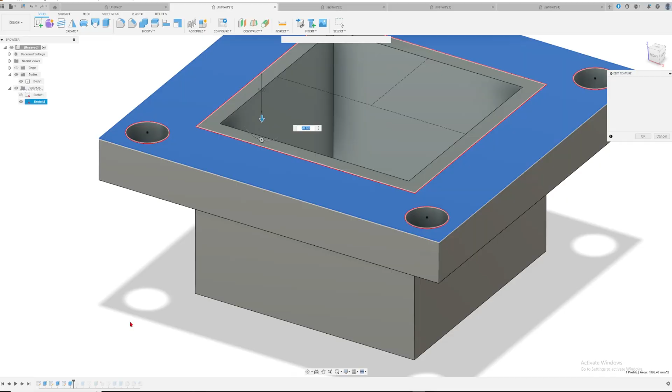So back when I started 3D printing, I used Fusion 360 to model all my stuff. And the things that I modeled there had overhangs, and I did not know how to overcome those overhangs. So once I made the model, I just put it into whatever slicer I used, sliced it, then generated supports to hold up that part of the model.

But as time went on, supports started to get annoying, and if you print with supports, you will know exactly what I mean. Supports give you a bad shape. The shape turns out not as good as you think. It has a different shape or form, whatever it is. And sometimes the support will stick super well to your model, and if you take off the support, you might take a piece of your model off. It's just very bad, hard to remove, and wastes material.

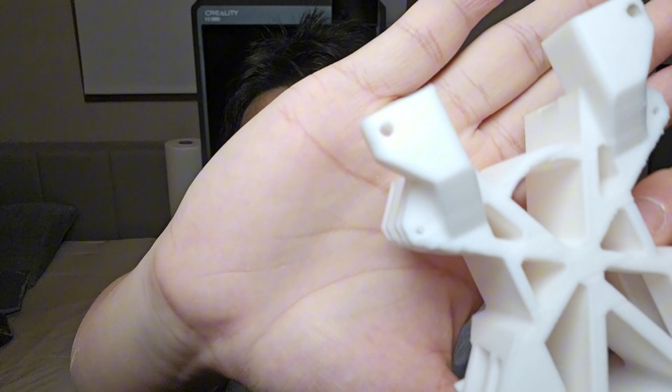As you can see there, it's kind of bad, but this piece is PC material, and PC is not the best material for overhangs, but it's still printing well like that. It's functional and useful, so it's really good. If this was PLA or PETG, this overhang would be flawless.

But besides that, this thing is complex and it's also still very strong. If I didn't do the cutout right here, it would just be fully infilled and it would look not good, not cool like this, right? It has this overextension, screws here, a rod there. It also has a connection right here, and then another connection right here.

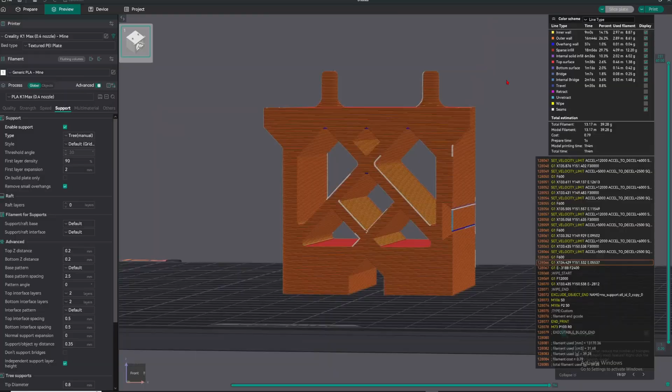And as you can see, this is not exactly identical. This part has this cut-in, this part does not. It's very complex, but like I said, printed with no support at all. And I'll show you now how I model these kinds of models. Very complex, multiple purposes, and still printed perfectly with no support at all. So let's head over to Fusion 360 and I'll show you how I model these kinds of parts.

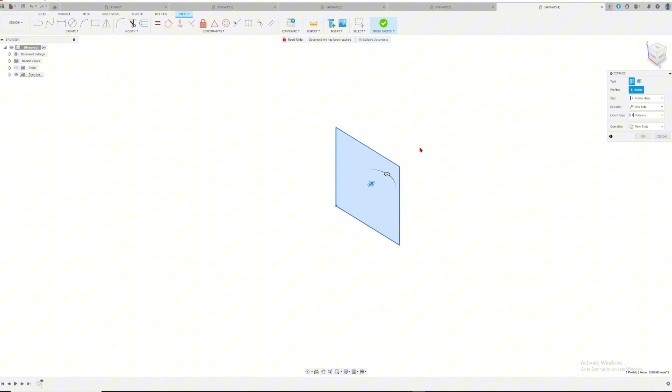We are now in Fusion 360, so I'm going to show you how I design those 45-degree angles so that I don't have to use supports while 3D printing and save a lot of material. So I'm just going to start with the cube again, 50 by 50 by 50 millimeters. Let's say for this cube, you need to attach it on the bottom and on the side, and on the top it has some other things pointing out. On the side you have screws. It's just a complicated box, so let's get started.

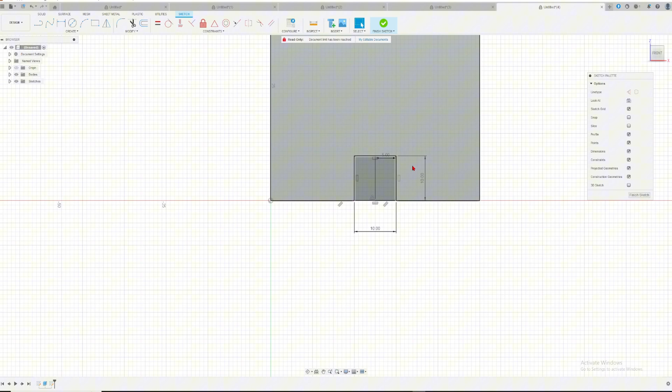So for the bottom here, I'm just gonna make a 10 by 10 cutout right here. R for rectangle, and then we're gonna do 10 by 10. E, extrude all the way through like that. Okay, so now we cannot print like this anymore. We can still print it the opposite way, right? So yeah, that's good. But what if we have some overhang up here too?

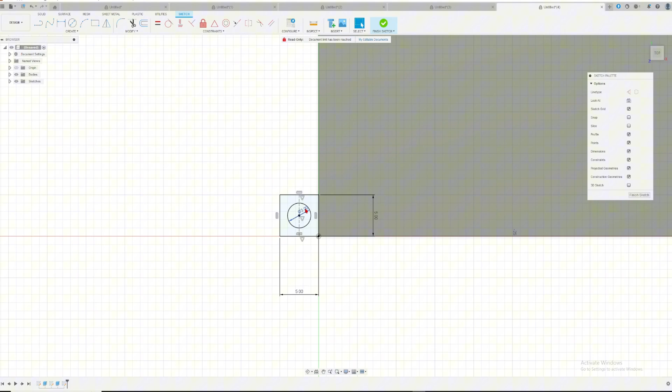So now I'm gonna make a sketch on the top face. R for rectangle, and I'll do a 5 by 5 square right there. I'll find the midpoint right here. C for circle, and then I'll do 3 millimeters. Let's say it's a 3 millimeter screw, right?

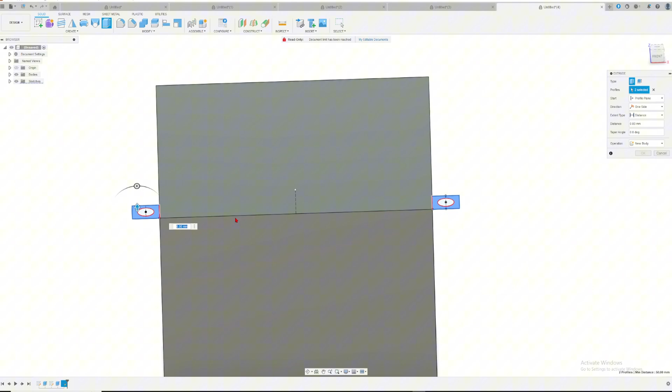And to do it for the other side, I will have to find the midpoint right here. Select everything here. Click mirror. Mirror line, the middle, click enter, and now we mirror this to the other side. Press E for extrude. We're gonna extrude this by just -5 millimeters, or 5 millimeters below. So now we cannot print like this anymore because we have overhang here.

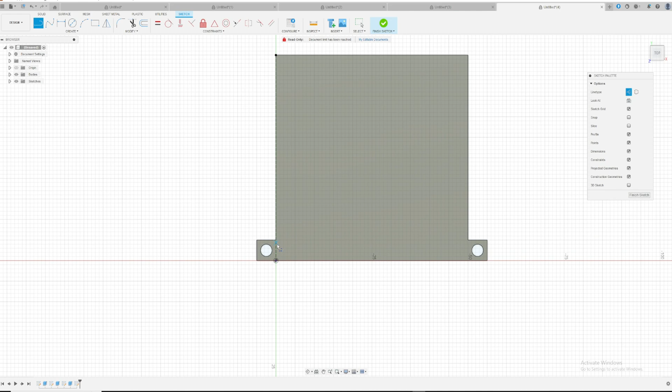And let's say at the top here, I'm gonna have to find the middle point, so I'm gonna make a new construction line. X for construction, or you can go over to the sketch palette and click construction line. And then I'm gonna make a line all the way through, because with this right here we cannot find the midpoint anymore. Well, we can, but it's a little bit off. So now I'm gonna draw a 10 millimeter line right here. Same thing with the other side.

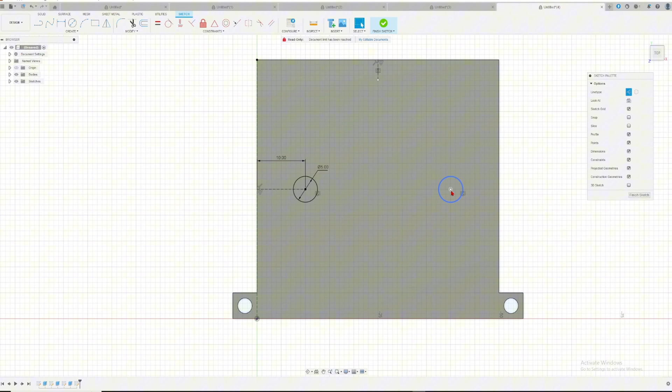And right here I'm gonna be making a 5 millimeter circle just for fun. And then to mirror it to the other side, I want to find the midpoint here. Select the circle, go to the tool, click mirror, mirror line, select the mirror line. Now we have these two circles. I'm gonna extrude these by pressing E on my keyboard. Let's just extrude this by 10 millimeters, something like that.

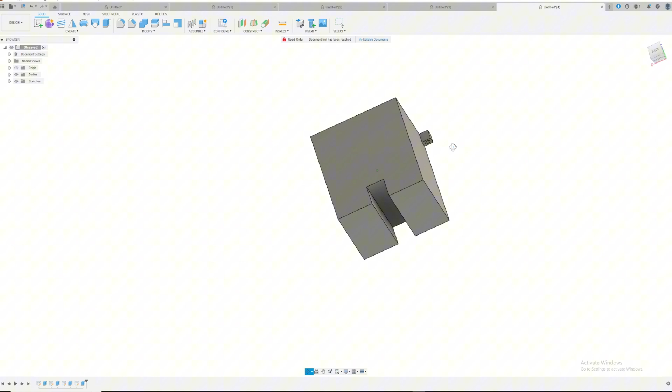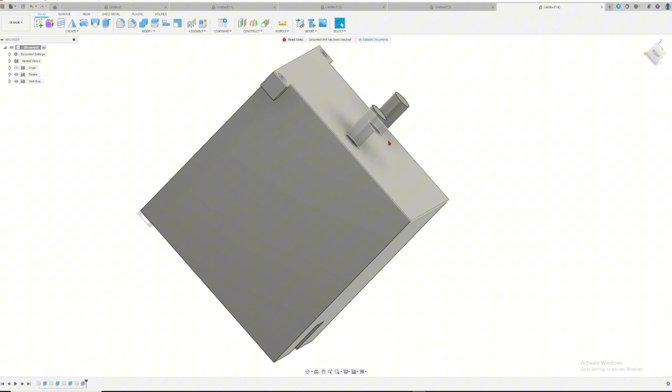Okay, so now we cannot print it like this because it will have overhang right here. We cannot print like this; it will have overhang with these two rods. We cannot print like this; it will have overhang for this and this. So it's very complicated now. Can we print like this? Nope. So with this, we cannot print anywhere. So let's say you have a situation like this, that you cannot print it any way without using support. Even at a 45-degree angle, you will still have support on some angle and it will look bad. To be honest, it will look pretty bad with these two sticking out like that.

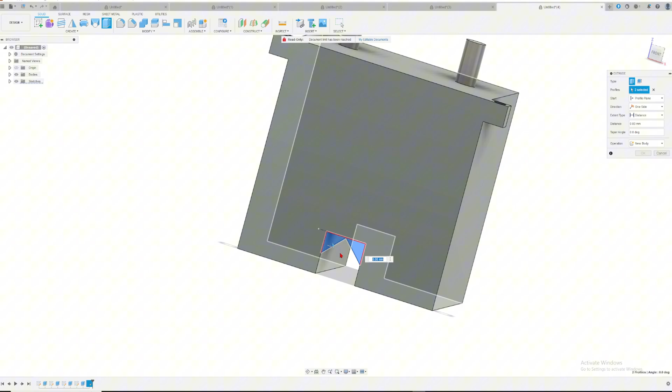What we can do now is just triangle everything out. So let me show you how. So for this bottom piece, I'm going to fix this by making a triangle cutout right here at a 45-degree angle. So this is already a perfect 45-degree angle right here. I'm just going to do that. And then we're going to extrude this all the way through. And now we have fixed this. So this no longer needs support. But we still need to add support here.

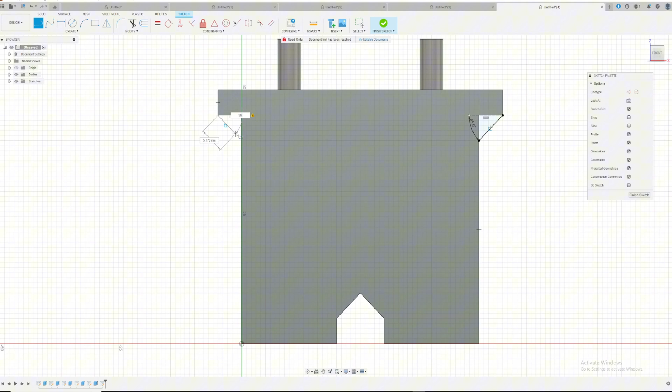Well, we can do the same thing. Make a sketch there. Select this corner. Make a 45-degree angle. Go down. Do the same thing to the other side. A 45-degree angle. And now we can extrude these over, and look at that, we have fixed all the overhangs that were wrong with these blocks right here. But let's say you don't want to print these whole blocks here, right? It's gonna waste lots of material.

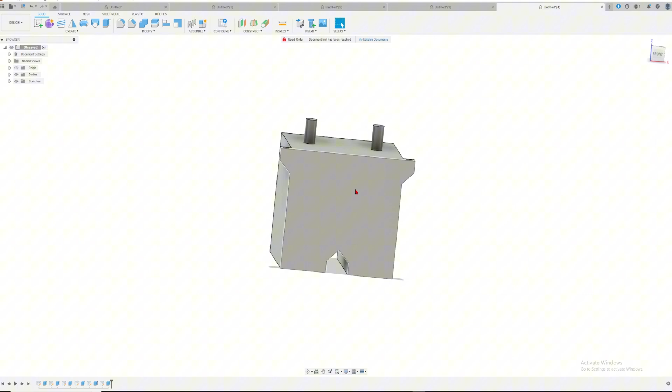So the next thing that we can do is make a sketch at the front face. R for rectangle. I'm gonna make a construction square right here. I want to leave like 5 millimeters throughout the whole thing just for strength, and then we're gonna go to the opposite corner. Make a line up here so that we have a perfect 90-degree angle to work with. Make another 5x5 square. Now we can connect these two together. Now we have a 5 millimeter perimeter on the outside.

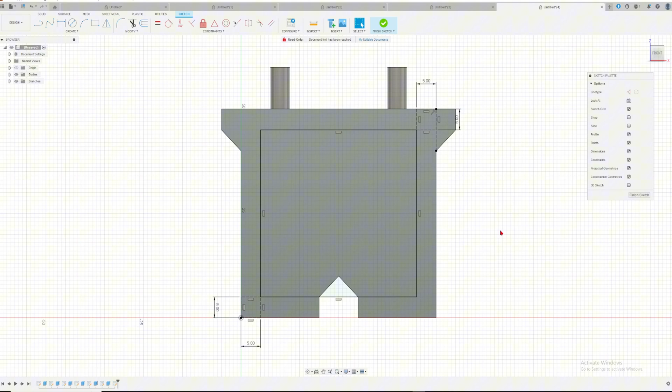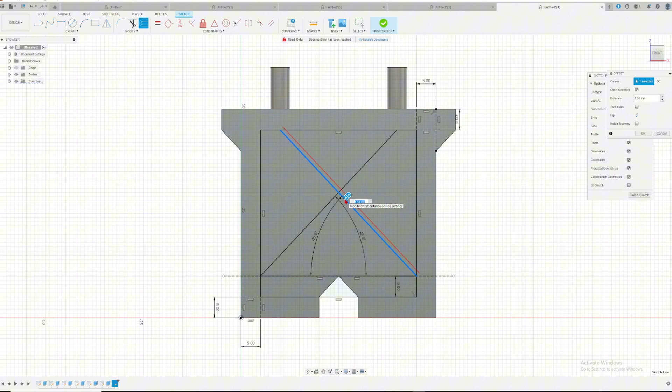We can work with the inside, and this triangle interferes with this, so we're gonna extrude this by 5 millimeters on the side. And now I can make a 45-degree angle cut right here. I'm gonna make this not a construction line. Do the same thing for the other side. And now I can just press O for offset and offset this by 3 millimeters. Offset this by 3 millimeters also.

And now we have this triangle thingy here. So it's basically a 45-degree triangle. It seems that if we extrude this, everything will be gone. So I'm gonna make this 8 millimeters at the bottom there. So now that we have this, I will make this line not construction anymore.

I'm sorry if this is complicated, not really like a walkthrough.

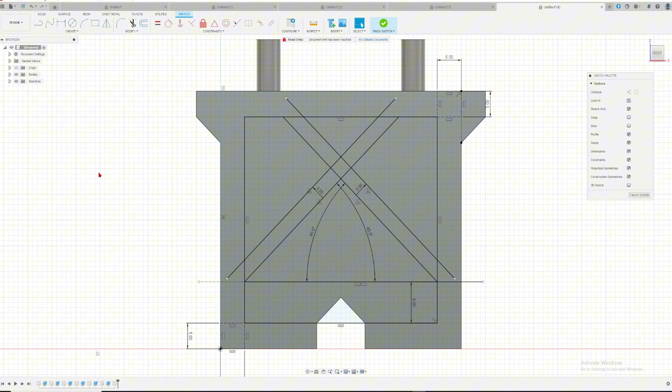I'm just showing you how to make things printable without support. And you will have to go through all of this. Okay, let's continue. So now that we have this, we can go ahead and extrude all of these out all the way through the back. And we have cut the middle piece of this block, and we have saved so much material there, and there, and these are still overhang.

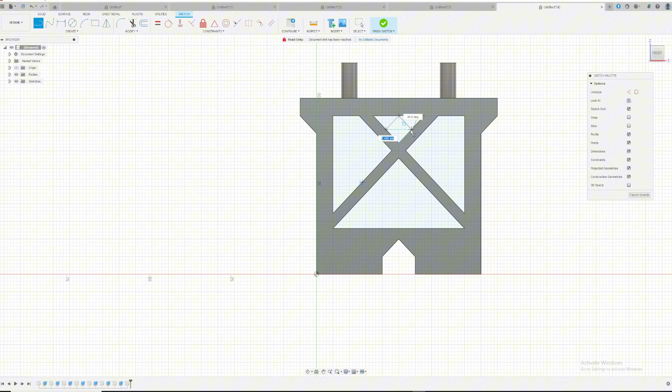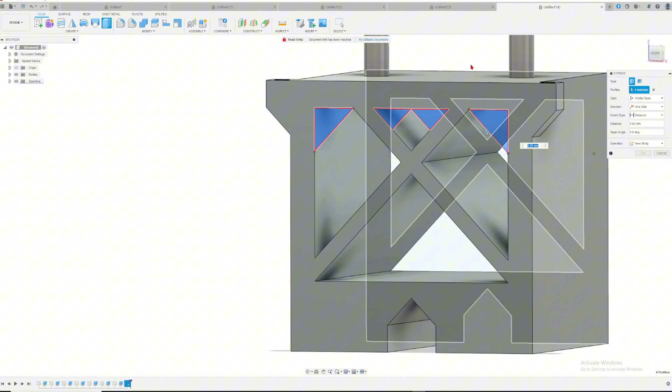So we can make another sketch and select the middle point, do a 45-degree angle. Same thing with the other side, another 45-degree angle, 45-degree angle. This we can make a 45-degree angle as well. It's 90, but it's pretty much a 45-degree angle. It just says a different number. So now we have this. We can extrude all of these through the back, and voila, we are now overhang free.

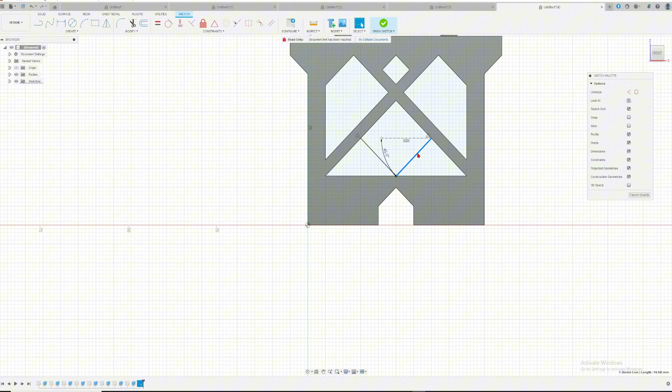So maybe this triangle right here is way too exposed. It may not have the strength. Well, what we can do is find the midpoint here, do a 45-degree angle again, which is in the middle perfectly. We can just offset this by 3 millimeters, offset this side by 3 millimeters. I will extend this line all the way through. Same thing with this side, all the way through like that.

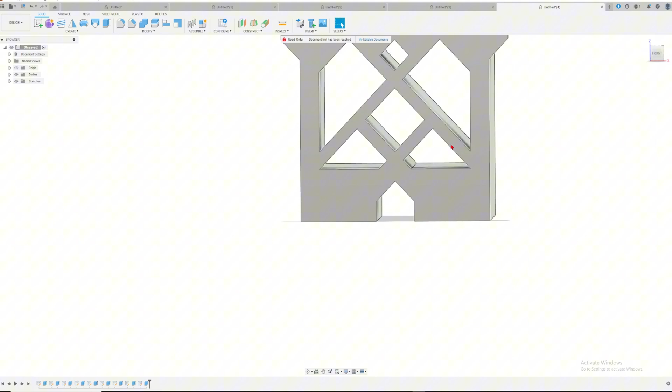Now we have this triangle down here, which we're gonna extrude all the way through, and look at that, this holds on to this. So if you push down here, it's gonna have this support, and it's gonna be a lot sturdier. But this shape looks very complex, and you can print this without any supports.

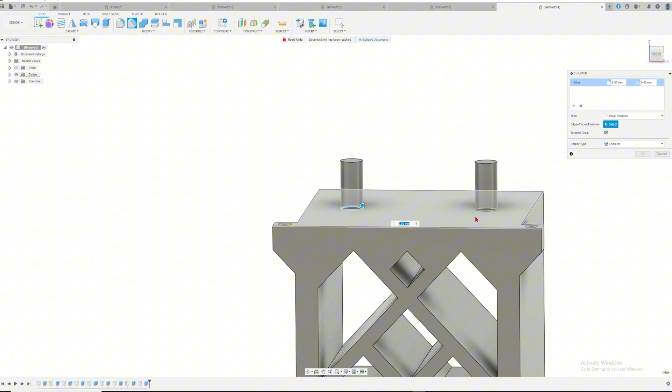So for these two, to make it a little bit stronger at the base here, what you can do is chamfer these. I'm gonna chamfer it by 2 millimeters, and then I'm gonna fillet these by another 2 millimeters, just so that it has a nice round shape going up. And maybe you want to round out the top of these two just so that it fits a little bit more snug.

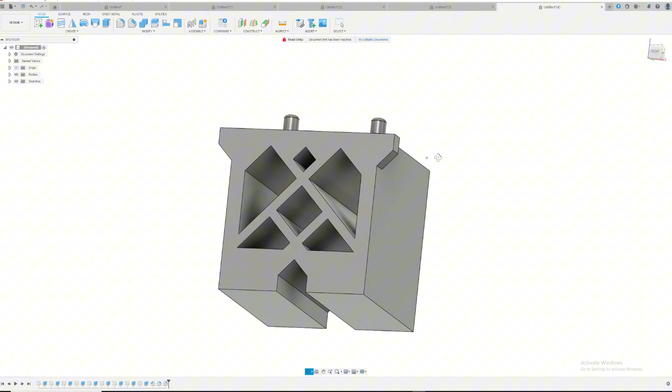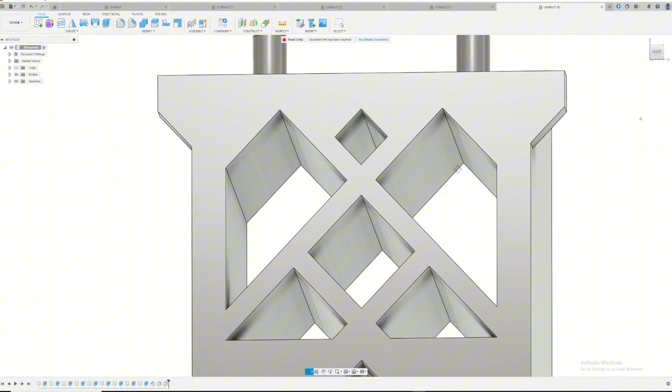Now we have this weird shape here that is printable without any supports, and we cut out some of the inner part to save materials but still have lots of strength in there. This is pretty much how I model things now. Try to look at the model, make triangles or 45-degree angles so that we don't have to print overhangs with support. Sometimes it's not avoidable, but sometimes it is avoidable.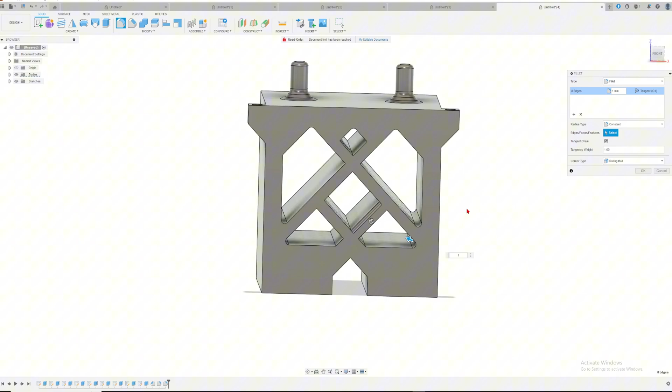And once you're finished with everything, you can go ahead and fillet all of these rough, sharp edges if you want to. I usually like to do this at the very end. Just do it by 1 millimeter. It just makes everything look so much smoother. It flows all together so much better. It will say that you have overhang right here, but don't worry about it. It's very minimal, so your 3D printer can handle the overhang right here, so it's perfectly fine.

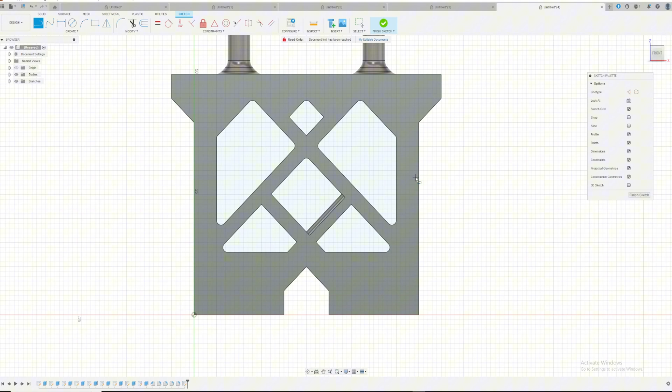So let's do one more scenario right here. You need this side to attach to something, right? So I'm just gonna find a midpoint here and just do a dovetail joint, 3 millimeters by 5 millimeters, 4 millimeters. It's not gonna be a perfect one. I'm just rough sketching this very fast. Now I'm gonna mirror this over, get rid of that construction line in the middle. So now we have this dovetail joint.

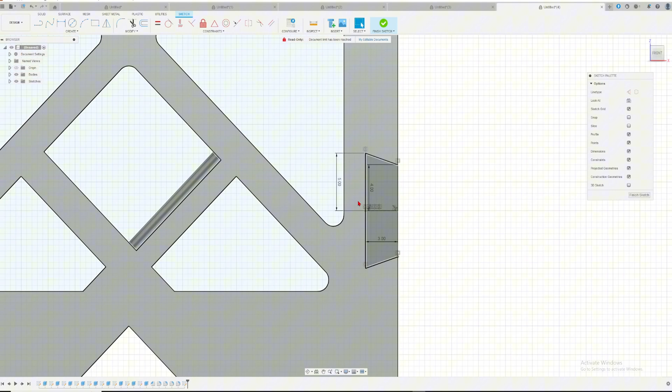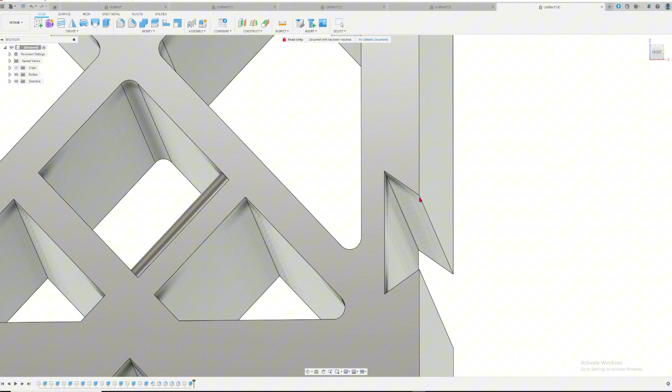I'm just gonna extrude all the way through, and now we have another problem right here. If we print it like this, everything is not overhang except this edge right here. This edge will become overhang, and it'll be very bad if you print it like this. If you generate support, it will generate support from the bottom and go all the way up, and it might not be the best way to do it. So what do we do now? Well, we make custom support.

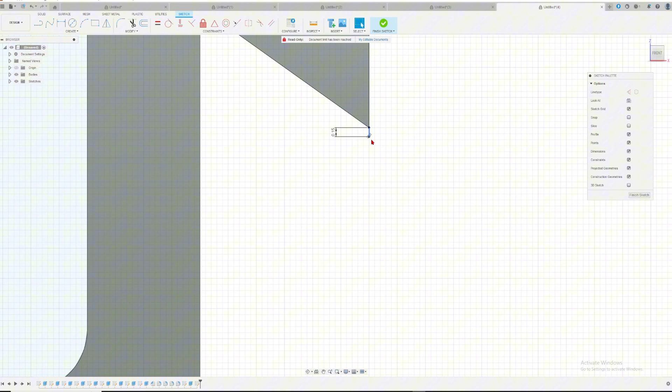So what I like to do is, you need to test this on your 3D printers. So for mine, it's 0.15 millimeter off from this to the support so that I can get rid of this very easily. I'll do the same thing to the bottom, 0.15. I'm going to be making a 0.5 millimeter support right here.

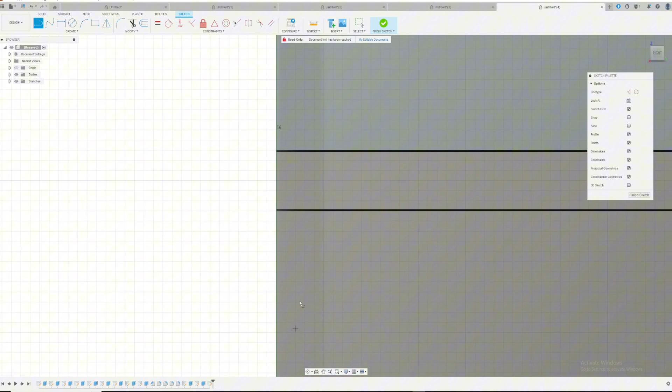So now that we have this, I'm going to extrude this all the way through. And we have a custom support, but not yet quite finished. I'm going to make another sketch with this plane right here. Press P for projecting this and this. So now we're going to make teeny tiny supports right here. So it will just be something like 0.5 by 0.15 millimeters.

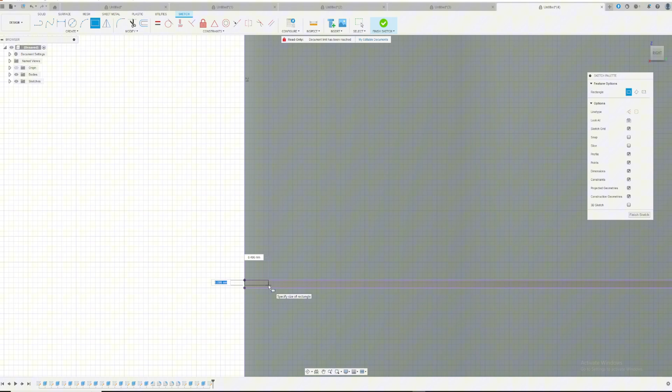You want these two to be connected, so we're going to do the same thing for the other side. 0.5 and then just connect that. So let's extrude these so that it's connecting with this, but you don't want to join them. You want to make them as new body, because we're going to copy that all the way through.

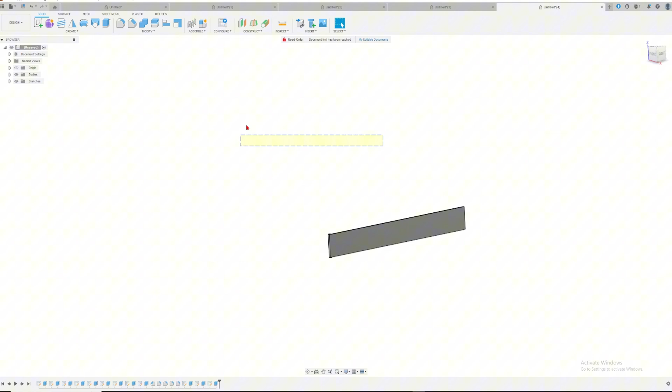So now we can go ahead and hide these huge blocks right here by pressing the 3D model and pressing V on your keyboard. Now we're going to go to create, pattern on path, click these two bodies, and then we're going to select this path right here. We're going to move this all the way to the back here, 49.75 to get it all the way to the edge.

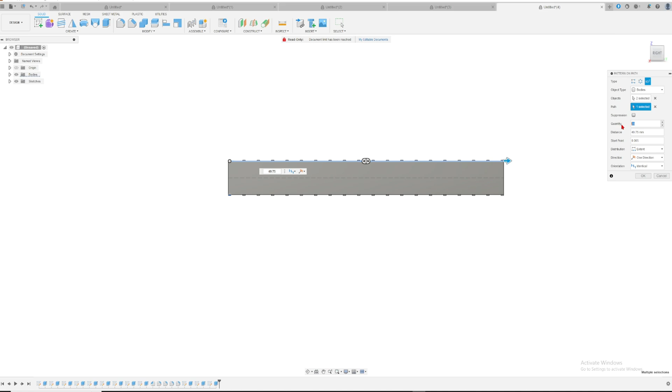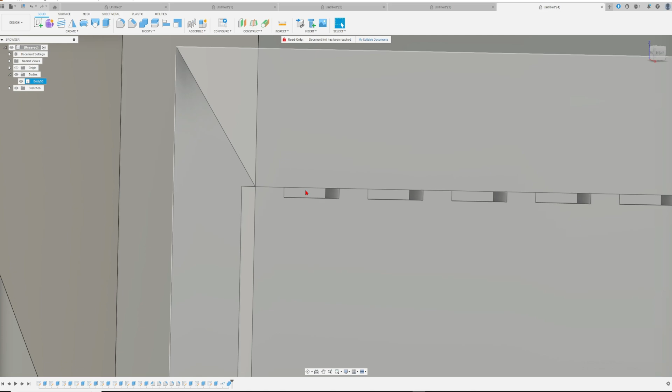The quantity, let's do 20. Let's do 35. Okay, 35 seems good enough, so we're going to do that. Now let's find the other body, and let's select everything, combine all of them into a body. So now we have teeny tiny overhangs, and our 3D printers can handle that. So these two are barely touching, if you can see here. Afterwards, you can just punch this thing and get rid of this very easily.

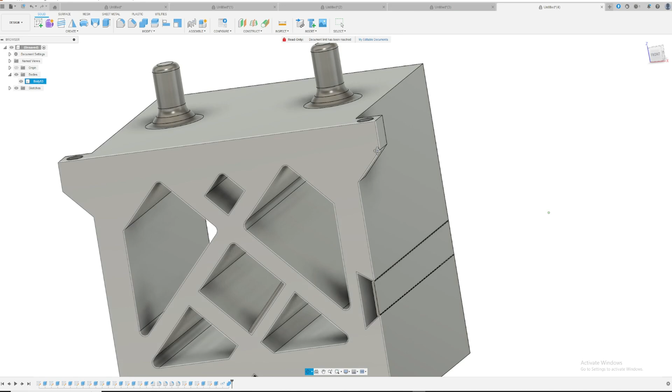Now you have a custom support. You have overhang angles that are fixed by 45-degree angles. The screw is also fixed with this 45-degree angle right there, and the bottom is also fixed. So now we can just print these blocks straightforward like this without any problem, without any overhang, without any extra supports. So yeah, that's how I model my 3D models these days now.

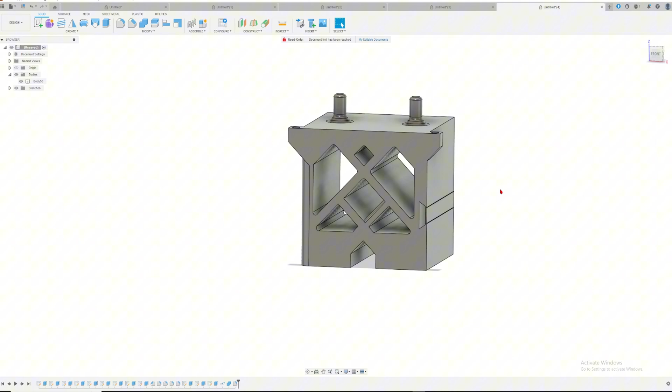Like I said, you can go ahead and fillet all of these angles to your liking, just make them look so much more professional. It looks so much better. But that is basically how I make my 3D models these days. Usually I don't really think about this, and I just model how I want to model, and then once it comes out, I have to generate all these supports.

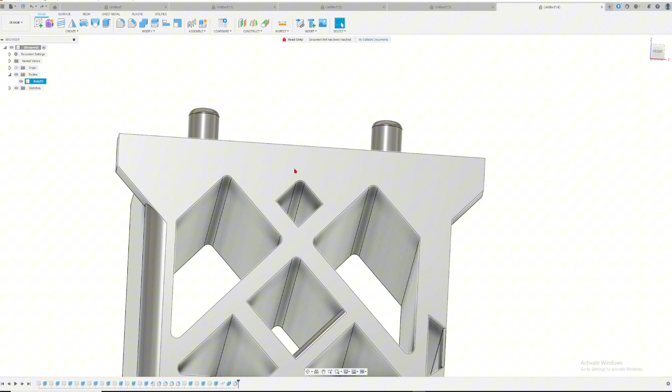Very bad. Supports going inside here are very hard to take out. By making this 45 degree with no support, it just makes life 3D printing so much easier. So yeah, there you go. Well, as you saw there, it's not that complex, but if you're just starting, it is quite complex. Before I made this, I had used many other methods and it was giving me trouble. I didn't really know how to make parts complex like this with no overhangs.

All my parts in the past have been printed with overhang, and yes, in some scenarios supports are not avoidable. Let's say you print a dome circle like this at the very top here, it is not avoidable. You need support there, but this method helps you reduce support a lot, and it's not complex to do. You just make a triangle 45-degree angle, and that is pretty much it.

And I think it looks really cool if you design parts like this instead of everything just a fully solid block. It will just look bland, not amazing like this. In the construction world, the triangle is the strongest shape. Just use it here and it works fine with these parts. I think that'll be it for this video of me showing you how I model things now and how to 3D model using less support by building either a built-in support or making angles so that it can print overhang with no support. Just makes life 3D printing a lot easier.